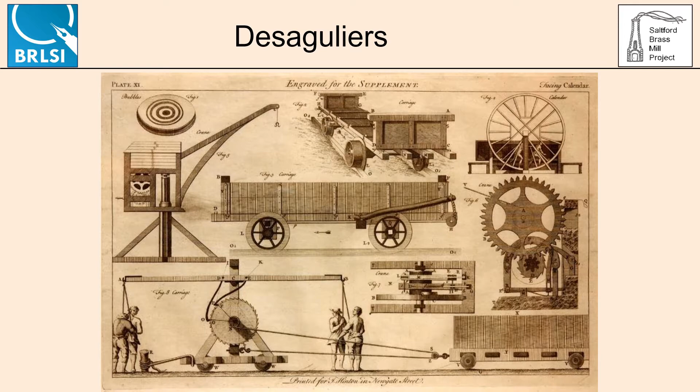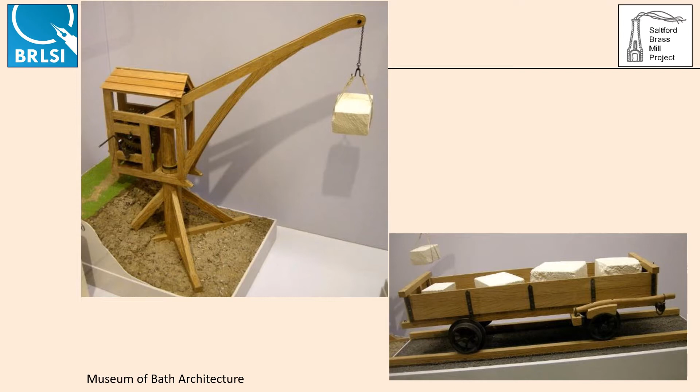A model of Padmore's crane and railway carriage can also be seen in the Museum of Bath Architecture. Desaguliers' drawings highlight a number of characteristics of the crane. Its construction resembles a post mill, with the machinery being housed in a frame mounted on a single vertical post. This enabled the crane to traverse its load in an arc around the post.

The crane incorporates a reduction gear, which, in the words of Desaguliers, is moved by a very small trundle or lantern, whose rounds take the cogs of a very large wheel, and so as to have the power of 2 men sufficient to raise the heaviest goods. The blocks of stone loaded onto barges in this way weighed around 1 ton each.

The mechanism also includes a ratchet to prevent runaway of the load, described thus. Whilst the weight is drawing up, the ratchet teeth of a wheel slip round below a catch or click that falls successively into them, and so hinders the crane from turning backwards, and detains the weight at any part of its ascent, if the worker should happen accidentally to quit his hold of the winch, or choose to rest himself before the weight is drawn up.

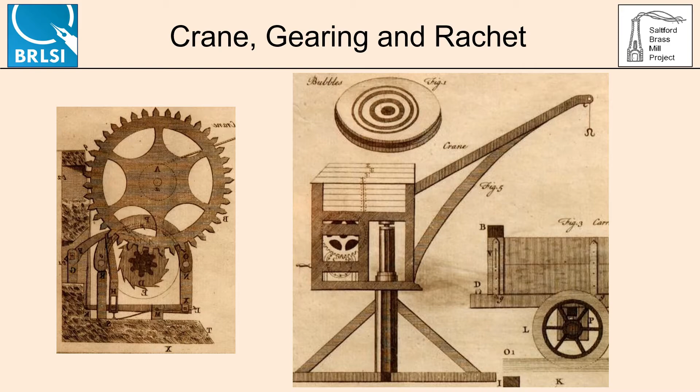The Widcombe crane was not the only crane built by Padmore, his most impressive machine being the Great Crane built next to the mud dock on the Grove in Bristol. As late as 1820, G.A. Cooke, the author of a travel dictionary, recorded, "On the western side of the mud dock is the Great Crane, erected on 14 pillars, encased with iron, by the ingenious Mr. Padmore, a curious piece of mechanism and worthy of observation."

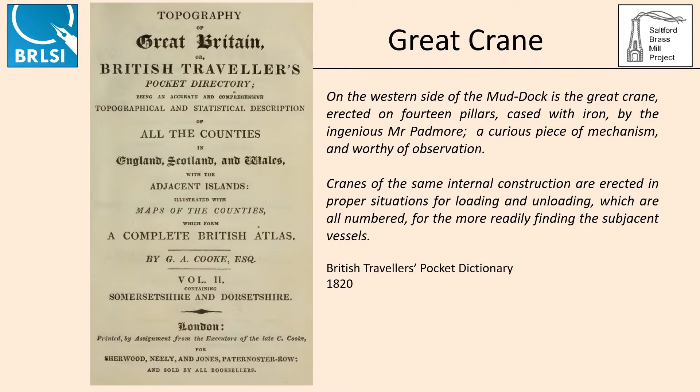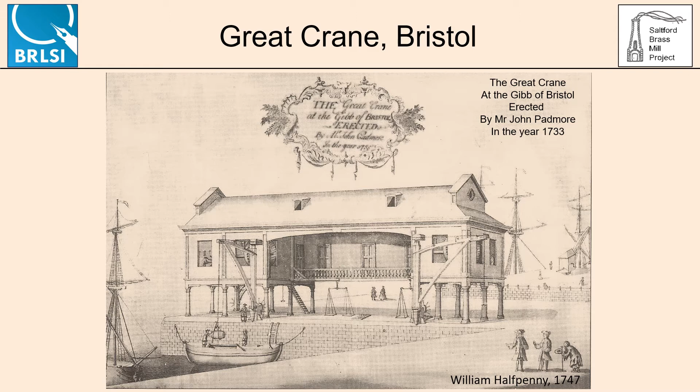The operating mechanism was housed in an enclosed frame mounted on 14 pillars, as shown in this image by William Halfpenny, drawn in 1747. The operating mechanism was connected to 2 rotating jibs, which traversed the wharf and the vessel being unloaded. Desaguliers describes the crane as having 2 speeds. Low-speed operation was similar to the Widcombe cranes, comprising a reduction gear and safety ratchet.

Desaguliers goes on to say, "As there are a great many bales of goods 5 or 6 times lighter than the heaviest goods, and it would be loss of time to employ the crane in the manner already described to raise them, there is a contrivance to loosen the lantern or trundle from the cogs, and then the wheel being also a walking wheel, the same men will get into it, in which case they have power sufficient to raise small goods 5 or 6 times faster than the heaviest, so the crane becomes of general use."

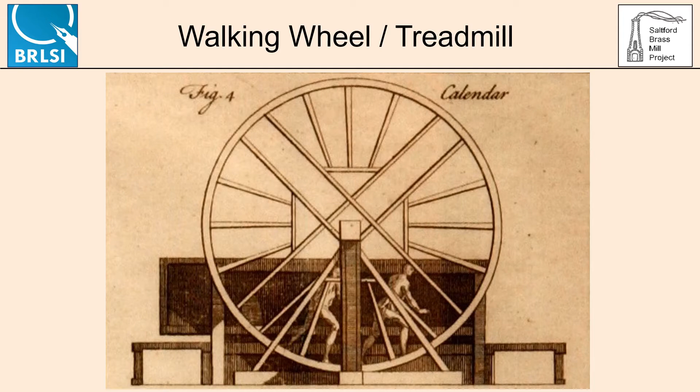The Transactions of the Royal Society for 1764 include a description of a new and safe crane with 4 different powers, invented by Mr. James Ferguson, a Fellow of the Society. The crane includes a safety mechanism, comprising a ratchet to prevent the uncontrollable fall of a load, the catch being described as constructed much in the same way as in the Great Crane at Bristol, invented by the late Mr. Padmore of that city.

The second of Padmore's inventions that are visible in Buck's engraving is Ralph Allen's railway for transporting stone from the quarries in Combe Down to the quay in Widcombe. The railway also features in Desaguliers' experimental philosophy. The carriages have flanged iron wheels which run on timber rails laid along what is now Ralph Allen Drive. Each carriage has a friction brake which operated on the rear wheels.

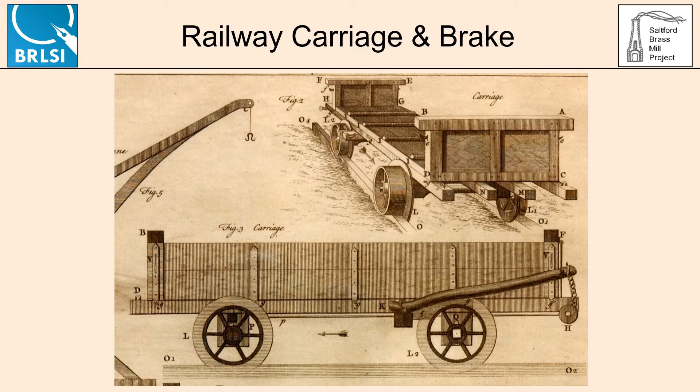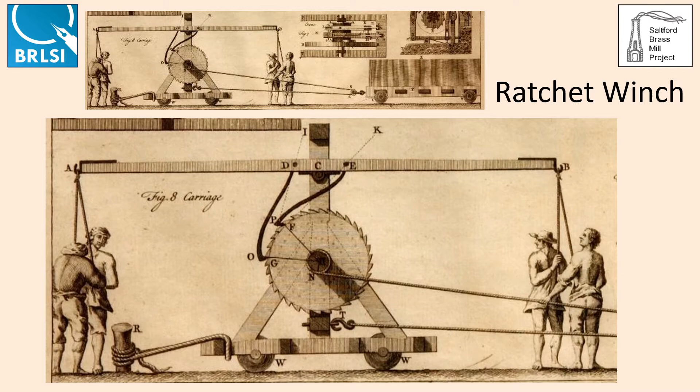Desaguliers also describes a rail-mounted winch, which could be deployed by 4 men to haul very large blocks of stone. The mobile winch sat on rails and was secured to a large stave driven into the ground. 2 ratchets operated on a toothed wheel keyed to the winch drum. The men alternatively rotated the winch through 1/8 of a turn by hauling on the pivoted beam mounted overhead.

The third of Padmore's constructions seen in Buck's engraving is Widcombe Brewery. A contemporary description describes the maker of the mill as John Padmore. The description goes on to describe how the mill was so constructed to grind and screen malt and pump wort up from the cask into the copper at one time with 1 horse only.

And now we turn to Padmore's involvement in waterways and harbours. We have observed Ralph Allen's stone yard at Widcombe, but the next challenge was how to move the stone from Widcombe to Bristol and thereby to markets around the world. There were 7 weirs between Bath and Bristol, which meant transshipping the stone 7 times before the cargo even reached Bristol.

Ideas had been floated to make the Avon navigable between the 2 cities in the mid-17th century, but had not come to fruition. In 1712, Bath Corporation secured an Act of Parliament to make the river navigable, but it was not until 1724 that a group of entrepreneurs formed a committee to turn the vision into reality. Ralph Allen was a key promoter of the venture and also the committee's treasurer. John Padmore is described as playing an important part through his technical skills in the execution of the grand design.

Between 1725 and 1727, Padmore was contracted to construct the locks and cuts on the Navigation, and works which are attributed to him include Locksbrook Cut, including the bridge and western lock, Saltford Lock and Keynsham Lock. Padmore also carried out repairs to the Navigation after it was opened, works being recorded at Swinford and Newton Ford, and these works carried on until his death in 1734.

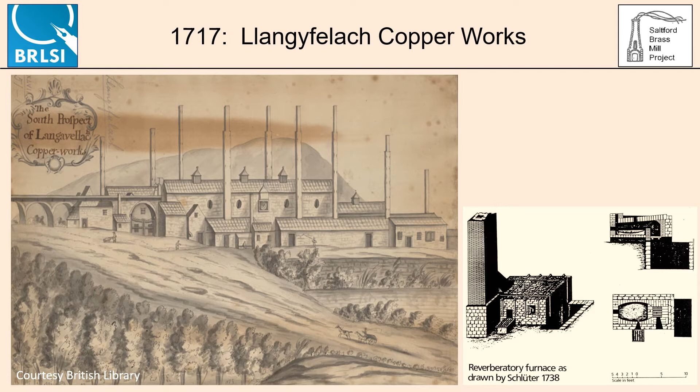Each of the tall chimneys served a furnace, similar to the furnace observed by the German traveller Schlüter in the Avon Valley in 1738. Interestingly, the promoter of the scheme was Dr. John Lane, who was also a proprietor of the Avon Navigation.

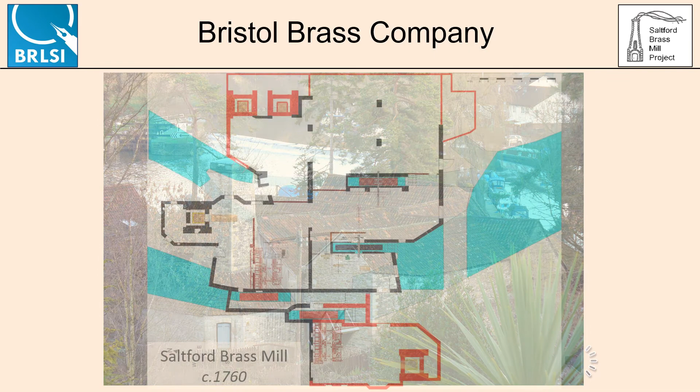In 1734, we find Padmore once again in South Wales, this time engaged in the construction of a copper mill. The mill is a water-powered battery and rolling mill, and displays many similarities to Saltford Mill, which was converted to a brass mill in 1721. This includes multiple sets of battery hammers for the manufacture of hollowware, an annealing furnace, and 2 sets of rolls for producing sheet metal.

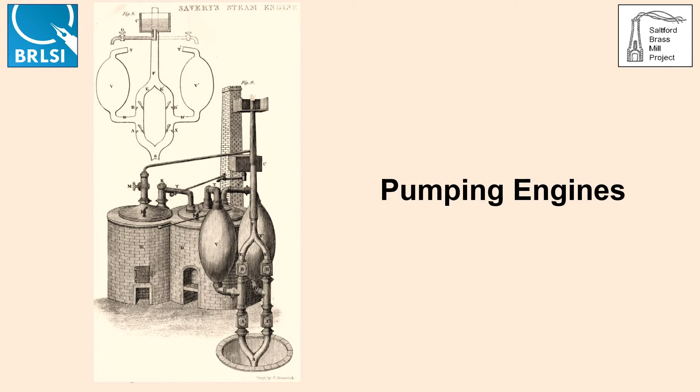The last of Padmore's achievements involves the design and construction of water pumping engines. In his 1824 History of Bristol, John Evans lists a number of entries for the late 1690s which relate to works by Padmore.

The entry for 1695 states that an Act of Parliament was passed to allow the Bristol Water Company to draw water from Engine Mill at Conham to supply the city of Bristol via a reservoir at Lawrence Hill. The reservoir was still in existence in 1881 when it was recorded as a fish pond by the Ordnance Survey.

And in 1696, Hotwell House was erected, which incorporated a pump for raising hot spring water some 30 feet to supply the spa, the spring being located on the banks of the River Avon, but below the high tide level. Turning first to Hotwells, the spa is shown on this map of 1815 to the west of the city, below Clifton.

Writing in 1740, the physician and political writer John Shebbeare described the waters at Hotwells in his book A New Analysis of the Bristol Waters. He described how the spring at Hotwells issued from the base of the cliff in the Avon Gorge, between the high and low watermarks, making the spring inaccessible for several hours a day.

Shebbeare describes how Mr. Padmore, a man well known for his genius in mechanics, enclosed the spring in a cistern and fixed pumps to raise the water almost 30 feet in all its native heat, purity and perfection. We are not told what type of pumps Padmore used, nor the method of powering them.

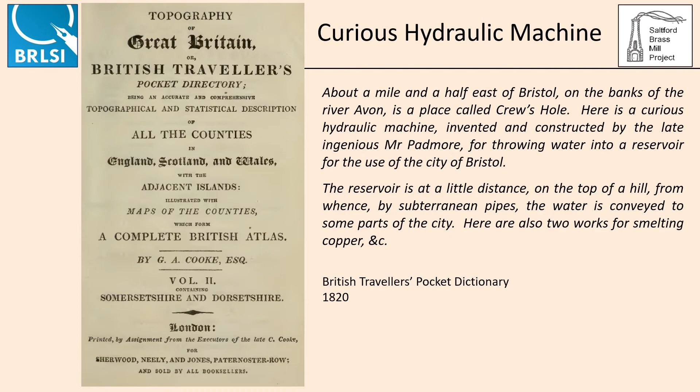Turning next to the Bristol Water Company, writing in 1820, Cooke describes a curious hydraulic machine invented and constructed by the late ingenious Mr. Padmore for throwing water into a reservoir for use of the city of Bristol. This engine features on Donn's map of 1769, described as engine house for conveying water to the city.

Latimer, writing in the Annals of Bristol, published in 1900, described the scene thus. The promoters purchased the lease of the extensive flour mills at Conham Weir. The water drawn from the Avon at this spot was conveyed to near Crew's Hole, where it was driven by an ingenious machine, possibly a primitive steam engine, to a reservoir at Lawrence Hill, and there flowed by gravitation into the city. The whole of the pipes were bored out of the trunks of elms. The engine house near Crew's Hole features on this map by John Cary of 1815.

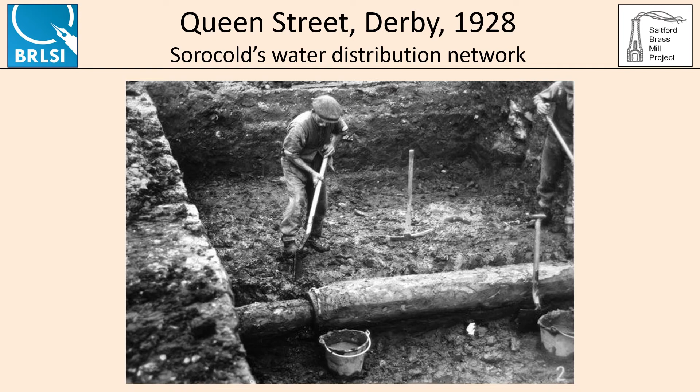The hollowed elm logs are reminiscent of the pipes used by Sorocold for his water distribution network in Derby, seen here after being unearthed in 1928. Examples of hollowed elm pipe logs can also be seen in the Museum of Bath at Work.

30 years after the engine was built for the Bristol Water Company, Padmore is again working in South Wales, this time erecting a steam pumping engine for draining a coal mine on the Gower. But what were Padmore's pumping engines?

Contemporary observers variously describe Padmore's engines as pumps affixed to a spring, by means of which the stream at Hotwells is elevated almost 30 feet, a curious hydraulic machine at Crew's Hole, invented and constructed by the late ingenious Mr. Padmore for throwing water into a reservoir for use of the city of Bristol. And there were formerly 2 machines for the same purpose at Crew's Hole at Conham, but they were taken down

in the year 1720. A report on the state of large towns, written in 1845, stated that the machine at Conham Mills was a large wheel engine. And Latimer, writing in 1900, raises the possibility that the ingenious machine at Crew's Hole was possibly a primitive steam engine.

Key events in the evolution of the steam engine are advances made by Watt, Newcomen, Savery and the Marquis of Worcester. James Watt entered into a partnership with Matthew Boulton in 1775 to commercialise Watt's invention of an improved efficiency steam engine. Newcomen had patented his atmospheric engine in 1705, with the first construction of a practical engine taking place

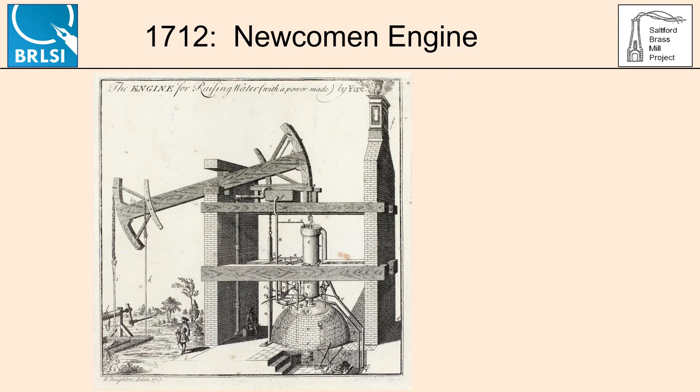The engine at Conham Mills is described as a wheel engine. There was a weir at Conham, hence the wheel engine could have been a water wheel driven pump. Padmore's engine may have emulated pumps designed and built by Sorocold in 1692 to deliver a domestic water supply to Derby, only 4 years before the Bristol scheme. Sorocold also used hollowed elm logs to distribute the water.

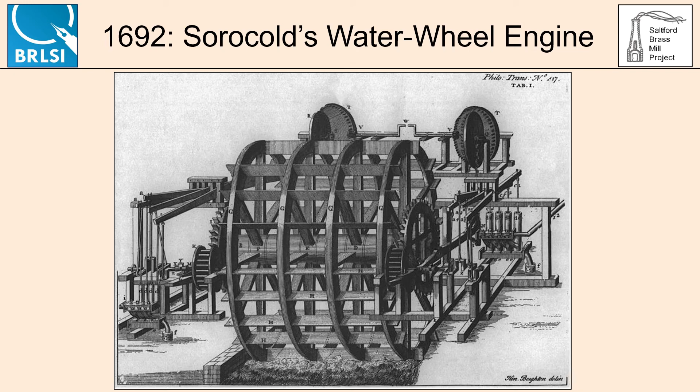Sorocold went on to install a development of his engine in London, installing the machine under arches of London Bridge, using the barrage effect of the bridge to create the head of water to drive the wheel. But what of the curious hydraulic machine at Crew's Hole? There is no evidence of a weir or barrage here in the late 1600s. That would be needed to create the driving head of water for a wheel engine, in addition to which there was a very high tidal range, making installation of a water wheel challenging.

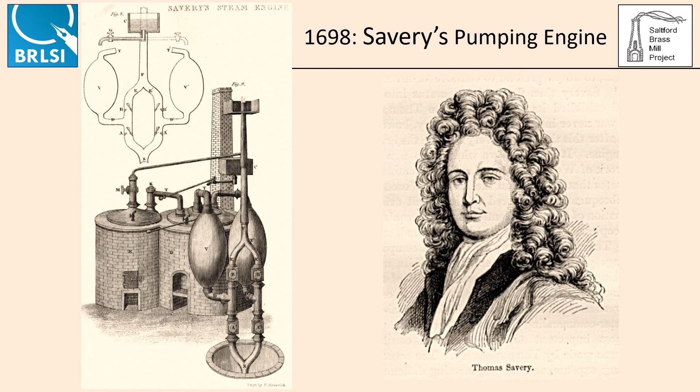Latimer suggested that Padmore employed an early atmospheric engine. But Padmore was working nearly a decade before Newcomen secured a patent for his fire engine, and Savery patented his pumping engine in 1698, 2 years after Padmore installed his machine at Crew's Hole. Some authorities believe that Savery employed ideas which had first been published by the Marquis of Worcester in 1665, described as a water commanding engine. Could Padmore also have had access to those papers? And was Padmore employing ideas at a time when concepts that were to revolutionise water pumping were in their infancy?

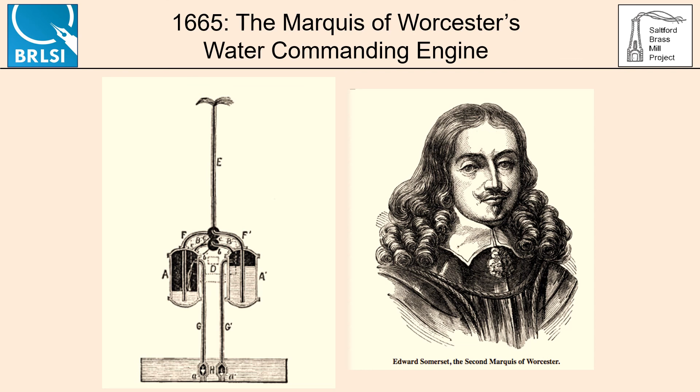So where should we place Padmore in the history of technology? If we accept that we are looking at a father and son, John Padmore the elder and John Padmore the younger, jointly their achievements include cranes, railways, navigations, locks and harbours, copper smelting works, battery mills and rolling mills, pumping engines and water distribution systems. They are working almost a century before recognised greats in these fields, such as Rennie and Brunel. They are also contemporary with other greats, such as Newcomen, Savery and Sorocold. And with respect to atmospheric engines, there is even a possibility that they were in advance of Newcomen and Savery.

John Padmore, genius in mechanics, should certainly be remembered as an important player in the Age of Enlightenment, who laid the foundations for the Industrial Revolution. As for his painting, it is hoped that when the management of the assembly rooms reverts to the National Trust, Padmore's painting will be returned to the BRLSI, where it can be part of a testimony to his contribution to the advancement of science and engineering.